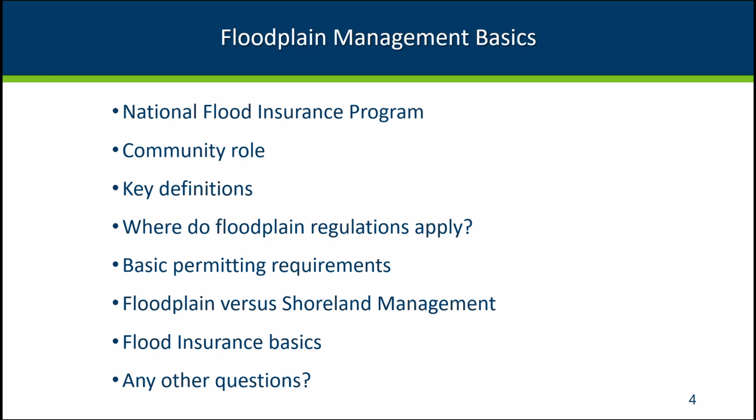But this is a national program. It was started in 1968 when Congress passed these laws, and the three main parts of the regulations and the law at the national level were to identify those higher risk areas, so that's the FEMA mapping part of the program, to have some national minimum development standards, though they are regulated at the local level, and to make flood insurance available.

Flood insurance was really spotty. It was hard for private insurers to handle the risk because their policies tend to be localized in one area. You have one big flood, and it was hard for the companies to stay in business. So they made flood insurance available nationally to help spread out that risk, and they made it mandatory in 1973 if you've got a federally backed loan. Then more recently, mitigation got added as a big part of the floodplain management approach at the national level.

I mentioned that the national program regulations were put in place in 1968. In 1969, Minnesota adopted the State Floodplain Management Act, and in that, we said that the DNR will be the coordinating agency, and it's the state's responsibility to work with communities to get them enrolled in the program, to enforce some minimum standards, and provide technical advice and assistance. We are required by law to review and approve the floodplain management ordinances. And as a state, we provide assistance during disaster situations, though that's mainly with the Homeland Security Emergency Management Division.

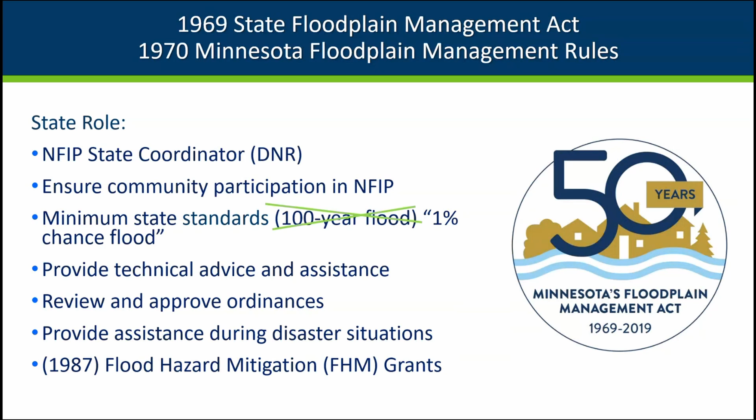And in 1987, we started a state-level flood hazard mitigation grant program, which is pretty unusual to have at the state level. We won't get into any details about that today, but we do have other trainings available talking more about the grant program. So we'll start a little bit with the roles and responsibilities.

So the zoning authority is the city, or the county for the unincorporated areas, and in some cases in Minnesota, we have townships that are the zoning authority. You are definitely the most critical part of those responsibilities. You're the ones that adopt an ordinance, get enrolled in the national program, and administer and enforce those regulations.

At the state level, we do have oversight responsibility. We do a lot of technical assistance and training. As I mentioned, we approve ordinances, and we do have mapping staff, and they're doing more of the data development and mapping than in past years. In these more recent years, we've got a lot of effort being done at the state level. But in general, we're coordinating between the communities and FEMA, and also with the other agencies in the state and watersheds. Watersheds are really important in the state. Some have regulatory authority and regulations that overlap with the state and local regulations, and often have better mapping and data available.

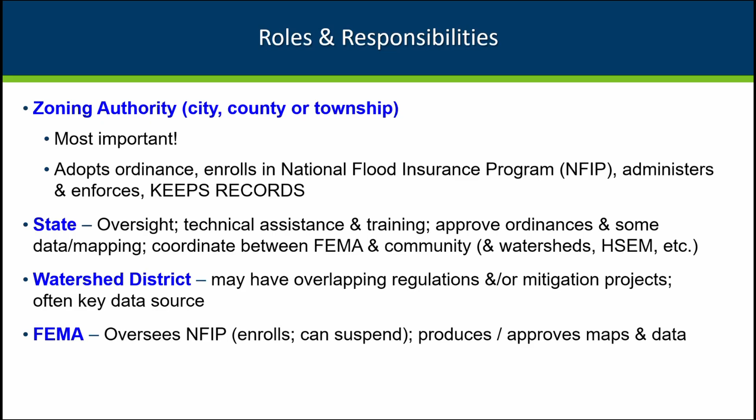I need to mention our DNR area hydrologists. They each have a portion of the state, and they're your first contact for specific projects. They issue our state-level public waters work permits and water appropriation permits, but they also coordinate on land use programs like floodplain management, shoreland management, wild and scenic rivers, and those things. So if you don't know your area hydrologist, especially if you're a local community staff person, you want to get to know who your area hydro is.

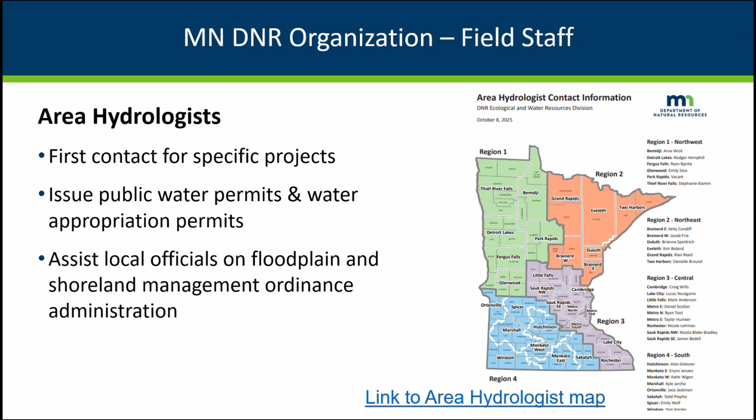So, talking a little bit about what's considered a community for the FEMA program, for the National Flood Insurance Program. It's whoever that zoning authority is. So in Minnesota, within city boundaries, the city's always the zoning authority. And then for the unincorporated portions, the county is the zoning authority. Except in Hennepin, Ramsey, and Anoka, they're completely divided into cities or townships that do their own zoning.

Townships in Minnesota do have the authority to be the zoning authority. Maybe a couple dozen of the townships in the state have chosen to take on that authority. So they will be considered the zoning authority if they have a DNR approved floodplain ordinance. And then, of course, the tribes, they can join the program, but they would work directly with FEMA as sovereign entities there. But we're happy to work with any of the tribal governments there.

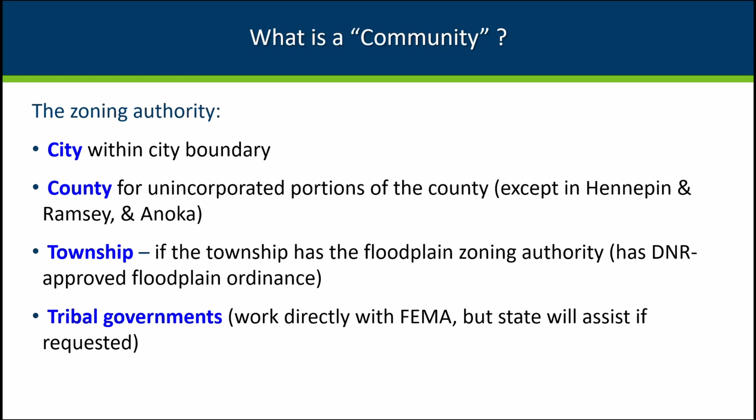So the National Flood Insurance Program is a partnership. The community, when they get in the program, they agree to adopt an ordinance and keep that current. They do have to go through the application process, and you just have to do that once. You don't have to do any kind of annual renewal things, but you are agreeing to enforce that ordinance and to keep records. And that's one of the things that we'll talk about several times throughout the training today. And we get into more detail in our upcoming training on Floodplain Administration 101.

But some of the benefits of being in the National Flood Insurance Program is that if you're in the program, that federally backed flood insurance is available to anyone within your community. Whether they're in the floodplain or not, they can choose to buy flood insurance. And you do have to be in the NFIP to be eligible for some of the types of post-disaster assistance, like most of the permanent public assistance that becomes available if there's been a federal disaster declared. And then some of the mitigation grants are only available if the community is in the program.

But one of the biggest benefits is you're helping to reduce that risk in your community. You're helping to prevent people from building in those higher risk areas and be more resilient over time. All of our counties that have the zoning authority are in the program. Many of our cities are, but we do have a couple hundred little cities that are not in the program. And if you work with those cities, we'd encourage them to get in the program. We try to make the process to get enrolled as easy as possible and provide recommended language and examples of the notices they would need to run and those kinds of things.

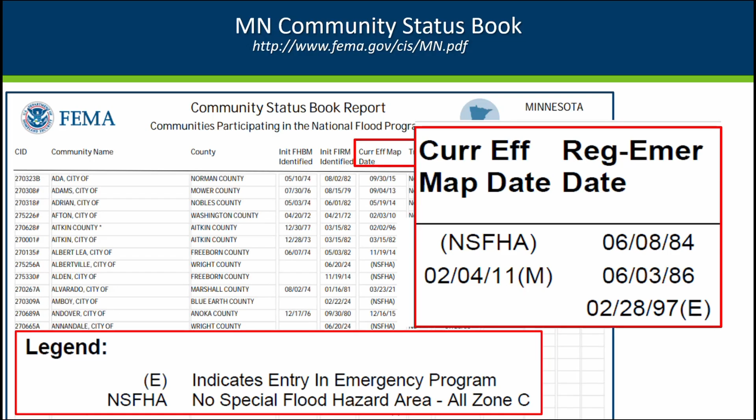And you'll see this NSFHA and say, well, what date is that for my map? It means that there's no special flood hazard area mapped in that community, and it's officially considered all the lower risk zone. On the old maps, it's zone C. If it's got the E here in the date that they got in the program, that means that they're in the emergency program. We have maybe 20 communities left in the state that are still in the emergency program. They're in counties that don't have the updated digital maps in general.

There's one other piece of information in here. It's talking about CRS, and CRS is the Community Rating System, and that's a program that you can get in separately, and you document that you're doing higher standards, you're doing better outreach, you're doing some mitigation projects, you get points, and the more points you get, the better class that you're in. And we don't have very many in Minnesota that are in CRS, but if that's something you're interested in learning more about, we'd be happy to meet with you and talk about that program.

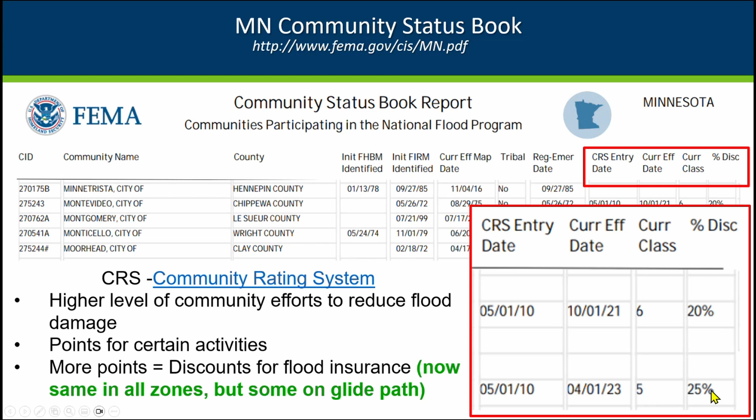The community status book does also list the communities that have mapped floodplain that are not in the National Flood Insurance Program here in the last few pages of that community status book. I do sometimes refer to this as the naughty list, and we would encourage any communities on that list to get enrolled in the program.

The medium risk area is usually the 500-year floodplain, or the 0.2% annual chance flood. But it can be areas where they've been protected by a flood control project and they've gone through an accreditation process, or it can be places where it's the 1% or the 100-year flood, but it's less than a foot deep, or it's draining less than a square mile.

And then the unshaded areas on the old map might be shown as zone C, and then on the newer maps, it's called zone X. And that's the areas where they're not showing any mapped risk, but there still can be local risk. Urban stormwater is definitely a bigger concern as time goes on. And so there still can be a flooding risk, but FEMA really focuses on the riverine areas and the lake areas.

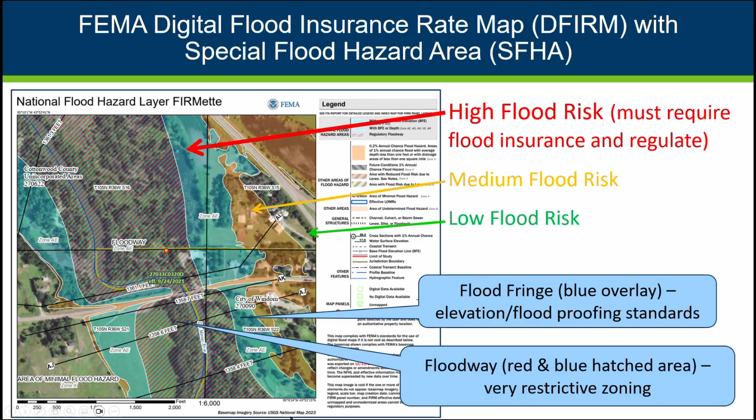When we're looking at data for the FEMA maps, in an area where they've got detailed information, they usually calculate the 10-year, 50-year, 100, and the 500-year, which we call the 10% flood, the 2% annual flood, the 1% annual flood, and the 0.2% annual flood. So we've got data for these different frequencies, but the regulatory level that we're talking about is that 1%.

And on some of the newer mapping, we also have the 25-year or the 4% annual chance flood, and something called the 100-year plus, the 1% annual chance, the upper end of the confidence level there for calculating that 100-year.

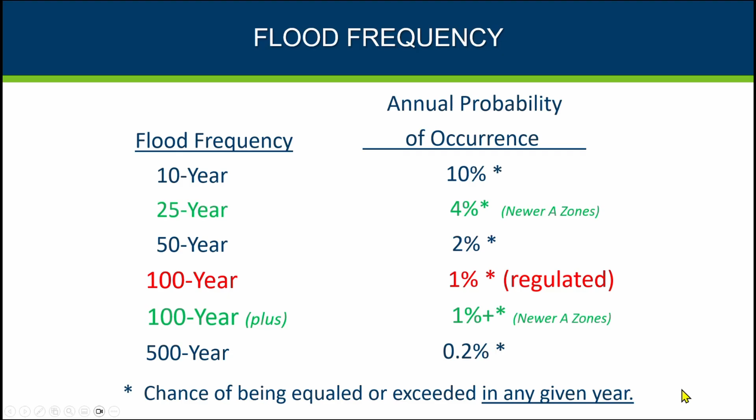So again, we'll be talking about that regulated area, but we do use that data from the other frequencies for other design purposes, like for septic systems, that 10-year. For critical facilities especially, we want to see them above the 500-year or outside the 500-year, some of those kinds of things. The 50-year we'll use for clearance when you're getting public water work permits, a lot of other good reasons to be having that data available.

And I've already used several of these terms, but they're basically synonymous. The 1% annual chance flood, the 100-year flood. We try to not use the term 100-year flood because people have a tendency to think, I've had a big flood, I've had my 100-year flood, I'm good for another 99 years. And that's not the way it works. It really is, you've got a chance every year of having that big flood or a bigger flood than what is shown on the maps.

Another term we'll be using here is base flood elevation, which is what FEMA refers to that 100-year flood level as frequently. If you look in Minnesota law, it'll talk about the regional flood, which is the same thing.

And when you're talking to lenders or insurance agents, they'll tend to refer to it as the special flood hazard area, where the flood insurance is mandatory if you've got a building in or touching the floodplain and they've got a federally backed loan. And sometimes we'll just refer to it as the high flood risk area. We'll talk about a couple of basic definitions, and then we'll go into talking more about some of the regulations.

So right from the beginning with this program, folks realized that not all floodplains have the same level of risk. And so when FEMA, or the feds at the time, that was actually before FEMA existed, but when the feds were looking at what the regulations should include, they said, you know, we recognize that if you're right next to that river, you're going to have greater velocity, greater depths of flooding, definitely higher risk than someone who's maybe on the very edge of a floodplain. Maybe you're in a backwater area, or you're on the very edge of the Mississippi River where it's very shallow. So they decided that we're going to treat the higher risk part of the floodplain differently.

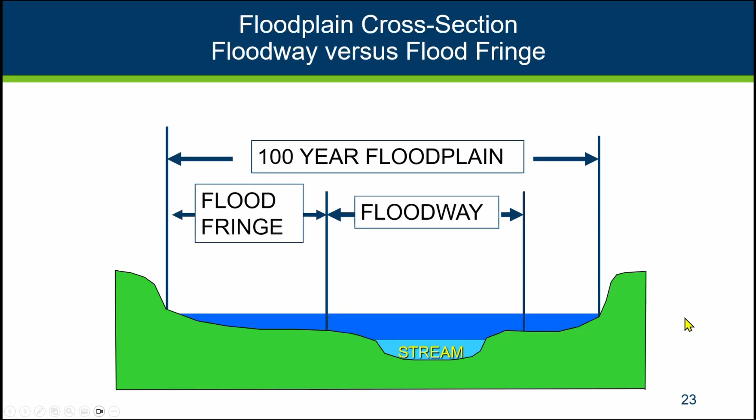And that's the area where we're not going to allow most types of building. And in Minnesota regulations, we say no new buildings can be in this higher risk area. So what they did was they had the engineers model what the floodplain would be at that time, or whenever they were doing the initial modeling. And then they would say, okay, what part of this river should be set aside and left for that flow to go through during times of flooding?

Because we know that it's going to be going certainly along the river and some of those near overbank areas. Where's it high velocity? Where is it deeper? What area do we need to save for the floodwaters to go through? So like on this example, we've got a road along here. We know there might be some culverts connecting it. So it might be getting flooded over here, but it's more of a backwater. You're not going to have the flows through this area so much. So that's an area that they might say, this can be the flood fringe.

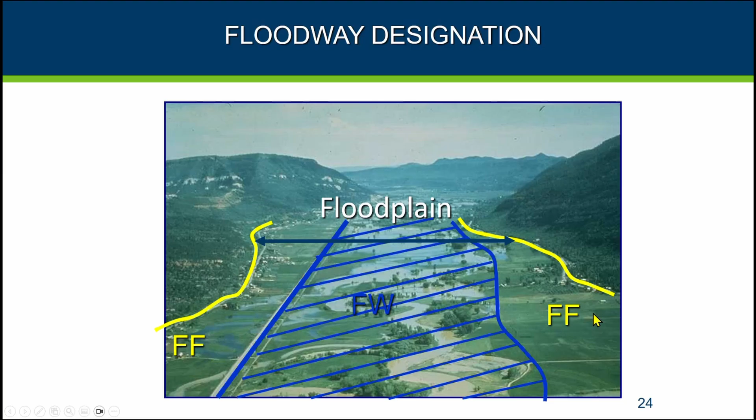And then over here, we might have a little community. They want to be able to allow some of the building expansion of that community. So they drew along there and said, we'd like this to be our flood fringe where we're going to be allowed to continue to have filling and development. And then the engineers would simulate that the flood fringe was all filled in and developed, and then run their model again. And if you take up some of that space with it being filled, it does cause what's left in the floodplain to have a higher flood level.

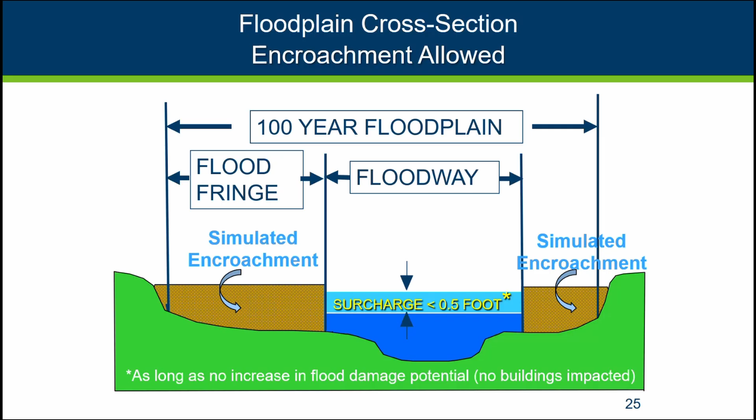The national standard says that filling can't cause more than a foot of rise. And in Minnesota, right from the beginning, since we adopted our rules and statutes back in '69 and '70, we limited it to half a foot and also have wording that says you cannot increase flood damage potential with whatever increase you have. So if there's current buildings in or right next to the floodplain, you can't cause any increase that would touch those buildings. So in an area that's already developed, that means you can't have any rise. And in more rural areas where you've got some space to work, you can have up to that half a foot of rise. So sometimes it was an iterative process to make sure that it was under that half a foot and that you weren't impacting any existing buildings.

So I mentioned the base flood elevation is the FEMA flood elevation, and for the federal regulations, the lowest floor for any new buildings or substantially improved or damaged buildings, including the basement, has to be at the base flood elevation or the 1% annual chance flood. In Minnesota, right from the beginning, they said, well, gee, we're allowing up to another half a foot of increase when we're establishing that flood fringe area that can be filled in.

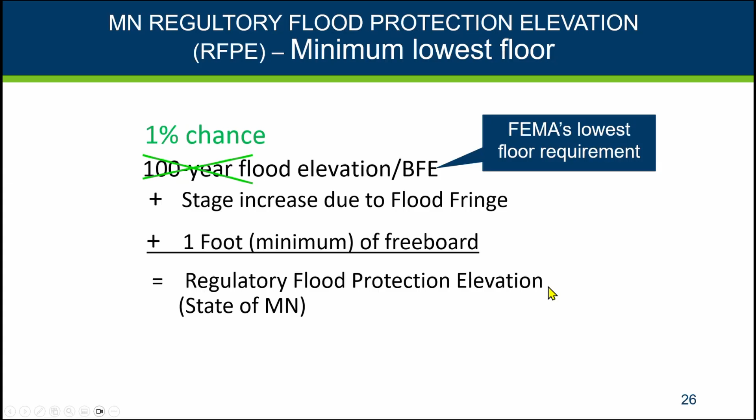So that's really what the flood level would be, is that flood elevation plus any increase. And then we add a foot of freeboard, which is a safety factor. So we add those three elevations together, and we call that our regulatory flood protection elevation, our RFPE. For a little while, the freeboard requirement went away, but it became mandatory again after the 1997 state law change.

And those of you who have been around in the state for a while will remember that 1997 was a really big flood along in the Red River Valley, and a lot of damage. And the legislature said, we're spending a lot of money rebuilding here. We want this freeboard back in there so that we don't have that kind of damage in the future.

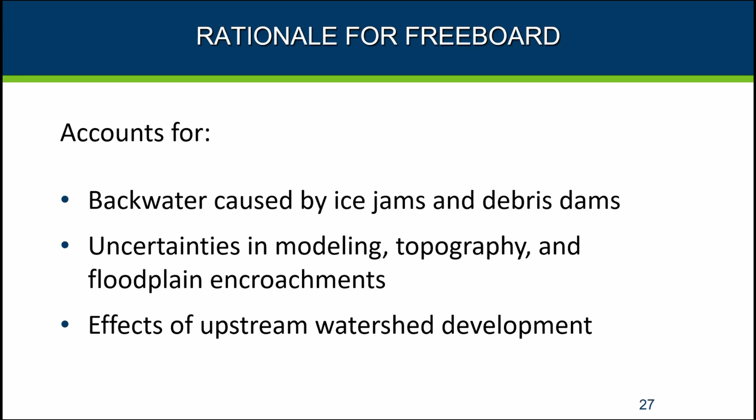Now, a freeboard, as I said, it's a safety factor. It takes into account the fact that when the engineers are doing the modeling, they're assuming no log jams, no ice jams, that water's all flowing nicely through the bridges and the culverts, no obstructions, which we know isn't reality. Other kinds of uncertainties, our modeling's gotten better over the years, but especially in the beginning, we had more uncertainty in our topography information and our data that we were using to develop the models, and also taking into account that there might be future development that hadn't been realized in the modeling.

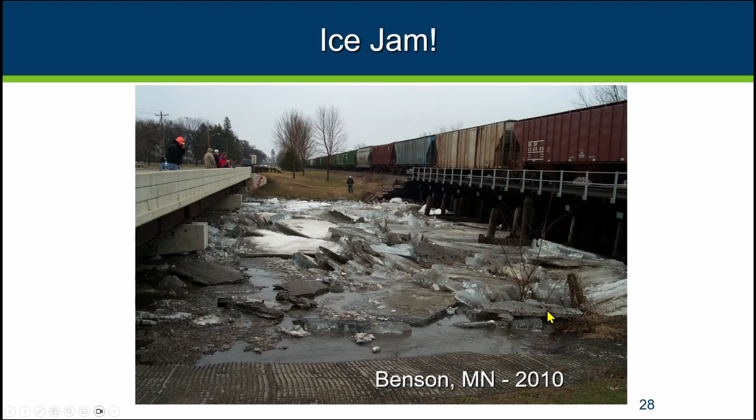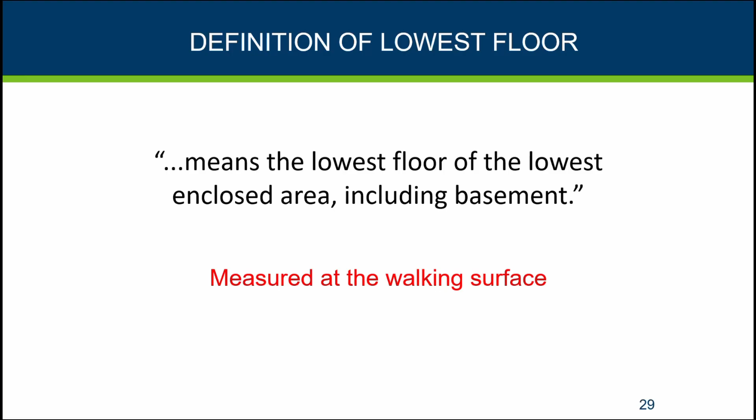So another important definition for our floodplain regulation is the lowest floor. When we're talking about that the lowest floor has to meet that minimum elevation, that regulatory flood protection elevation, we're talking about the walking surface of the lowest floor of the lowest enclosed area. So that includes basements, that includes crawl spaces, and again, it's measured at the walking surface there.

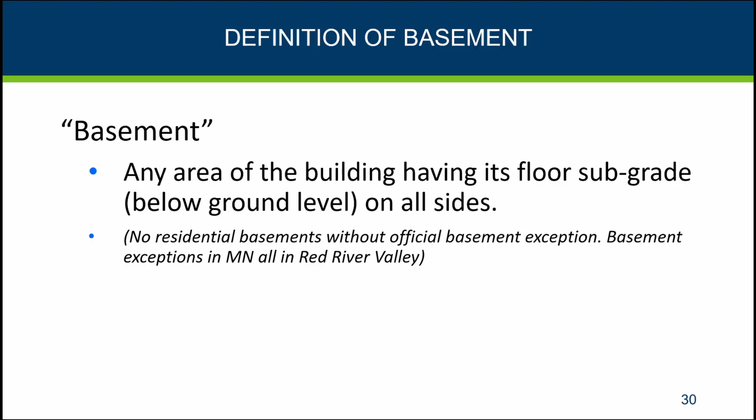And a basement in the federal regulations is any area that's below ground on all sides. And basically, residential basements are not permitted based on the federal minimum requirements, except we've got a handful of communities all in the Red River Valley area where they got a special basement exception, where they are allowed to have some basements if they meet certain dry flood proofing requirements.

The basement, you might have just a partial below grade. That's still considered a basement, even if we wouldn't necessarily call it a basement. We might call it like a split level or a lookout level, but that's still considered a basement. The other thing we run into is sometimes people will call it a utility space or mechanical space, or they'll give it some other name. They won't call it a basement or a crawl space, but that is still a basement according to those FEMA definitions. So that's still your lowest floor, and the walking surface, the top of that floor is what needs to be meeting the minimum elevations.

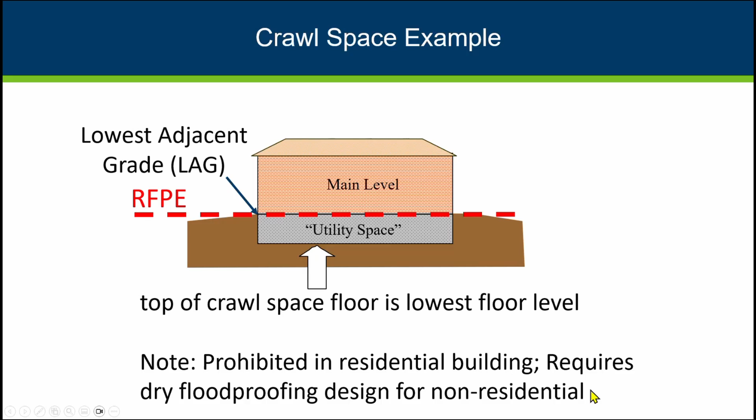And just a reminder that, again, they're prohibited for residential buildings. For non-residential buildings, they can do dry flood proofing and meet certain higher standards like that. So say we're looking at this building, and this is the regulatory flood protection elevation. Would that be meeting the minimum elevation? Let you think for a second.

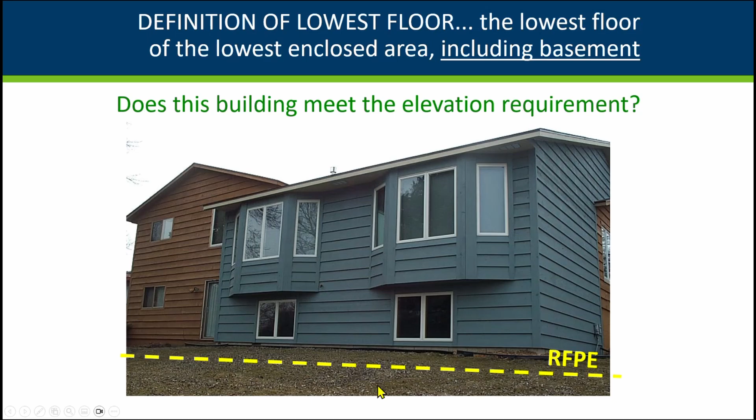But this is a split level, so that's a floor there, that's a floor, and you do have a lookout situation here. So that would not be legal if it was within a floodplain. That example actually was my house when we were putting on an addition, so it's not illegally built, but it's a reminder that in those situations, we're looking at that lowest floor.

I also put this in here because some of our watersheds and some of our local governments, they might have maybe a higher freeboard. Maybe they require a 2-foot or a 3-foot freeboard, but they're looking at the lowest point of entry. And so in a situation like this, they might be meeting that watershed requirement, but they're not meeting your local ordinance, because our federal state requirements are based on that lowest floor, not on the lowest opening.

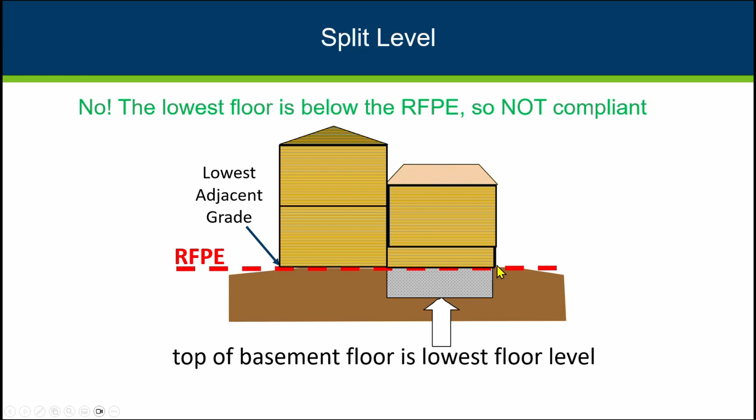So summary here, the key requirements for a building, especially a residential building, are that you're not filling in the floodway and the building's not in the floodway. You're having your lowest floor meet that regulatory flood protection elevation. And then if it's a residential building, they do have to have 15 foot of fill around the building. That can be a foot lower than that lowest floor.

And it can be a more gradual slope, or it could come down a little quicker. You might see sometimes some little retaining walls or something. But at this point, 15 feet out from the building, it's supposed to be at your flood elevation, including that stage increase.

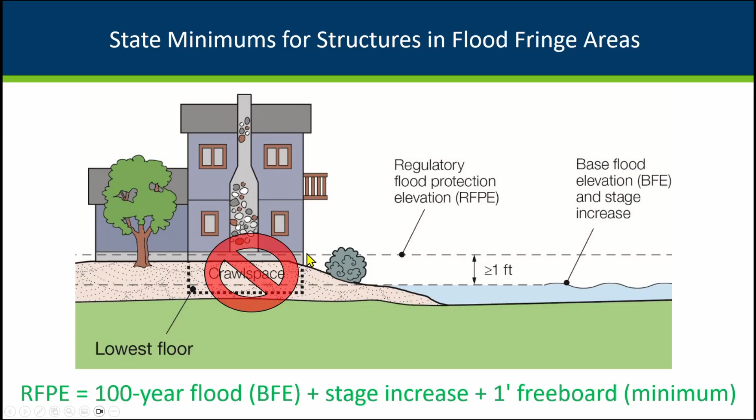Your lowest floor needs to be above that. One other term that sometimes confuses people is the ordinary high. People hear the high water in that ordinary high water level definition, and they think that's the same as the flood elevation. And the ordinary high is the official boundary of public waters in Minnesota, and we use it for shoreland setbacks and for determining if the work is going on below that ordinary high and they need to follow the public water work permit requirements.

But the flood elevation is usually a couple feet higher. And on rivers, it can be 10 or 20 feet higher. But on lakes, it's typically in the range of a couple feet higher than the ordinary high. The ordinary high is based on physical evidence. And it's most commonly where that transition is between predominantly aquatic and predominantly terrestrial vegetation.

And we have crews, our survey crews that go out and do ordinary high determinations on the lakes in particular, and they set that elevation based on that physical evidence. And they might look at wash lines and stain lines and things like that also. Whereas the floodplain is based on calculations, on modeling, analysis, those kinds of things.

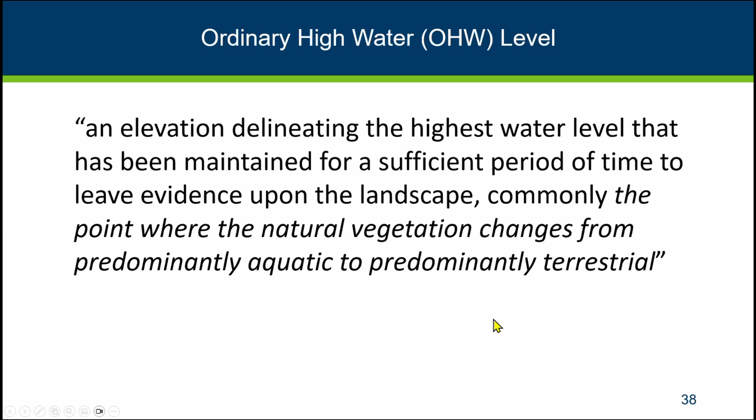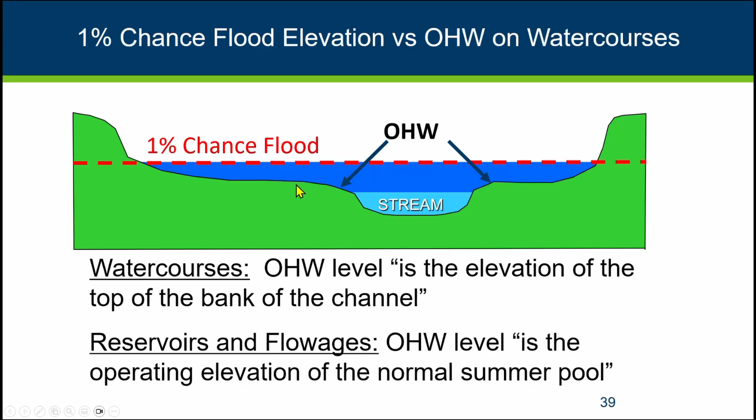And here's the official definition from the state statute there for the ordinary high water level. On rivers, watercourses, the ordinary high is defined as the top of the bank of the channel. And of course, the floodplain usually goes into that overbank area. So it's definitely in a higher, wider area.

So the ordinary high, it's established over a longer period of time based on that physical evidence. As I mentioned, it's used for our shoreland management setbacks. Whereas that 1% annual chance flood, the floodwaters, they'll be more temporary. They're not usually leaving any long-term evidence. And it's really based on modeling and analysis.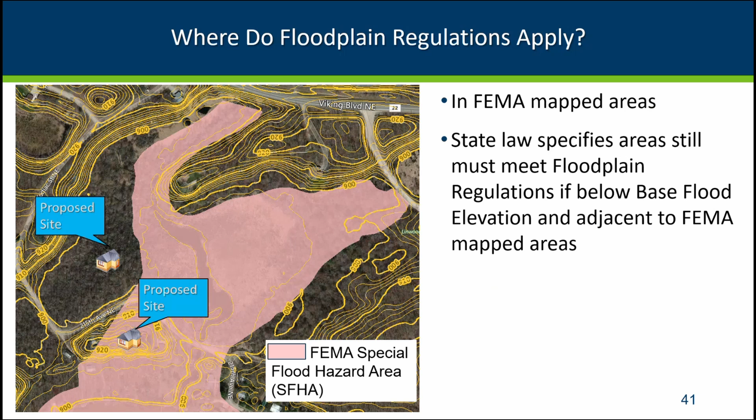So the person who's in this area, now with our LiDAR, we can see more often if an area is low and adjacent to the floodplain. It's been a requirement all along, but it was much harder to see those situations back before we had LiDAR. The other reminder is that we've got many areas where we're overlapping with floodplain and the shoreland regs.

The shoreland district in Minnesota, that goes 1,000 feet from those lakes that are classified, and at least 300 feet from any public watercourses. And if there is a mapped floodplain, it goes to the edge of that mapped floodplain. So remember that even if they're outside of the floodplain, which along the lake is pretty common to see, they still have minimum elevations within that entire shoreland district.

And what the shoreland rules say is within the whole shoreland district that if you know the flood elevation, you're going to use that regulatory flood protection elevation, which is that 100-year plus a foot. Most lakes won't have a stage increase. So it's usually just the 100-year plus a foot.

So here's your 100-year, you've got a foot, that's your minimum elevation. But if you don't have that flood elevation calculated, the shoreland rules say you use our ordinary high water level or the highest known water level, whichever's higher. So whichever's higher of the ordinary high or the highest known water level, you add 3 feet, and that's your minimum elevation.

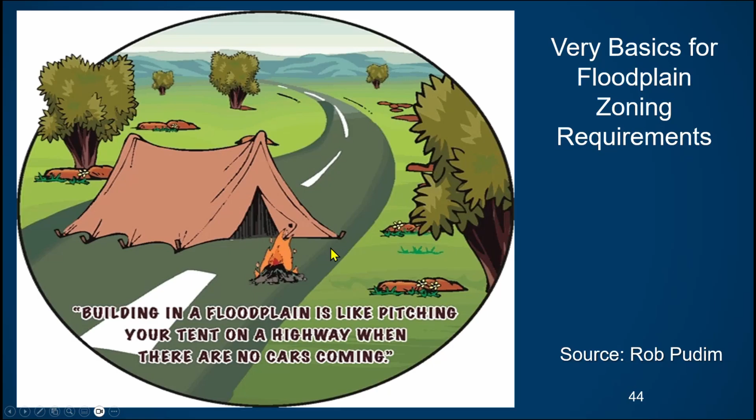So I'm going to talk briefly about the main zoning requirements. And this cartoon here says, building in a floodplain is like pitching your tent on a highway when there are no cars coming. Here's the road, we know where the cars are coming, and similar with the floodplain. We've got the mapped floodplain where we're most likely to have the flooding. We know that, it's on a map. We're going to make sure that we don't put buildings in that high flood risk area.

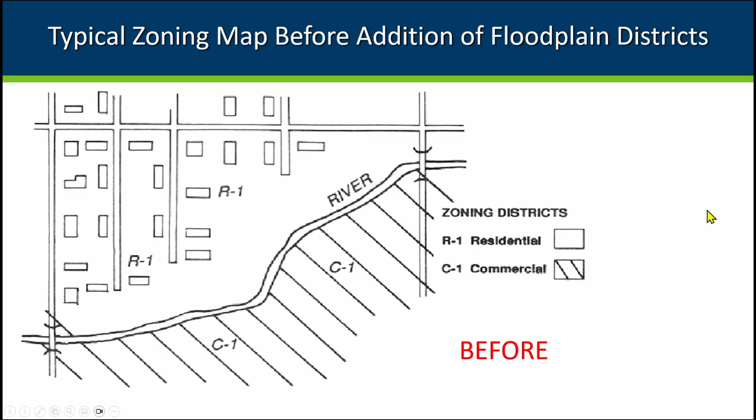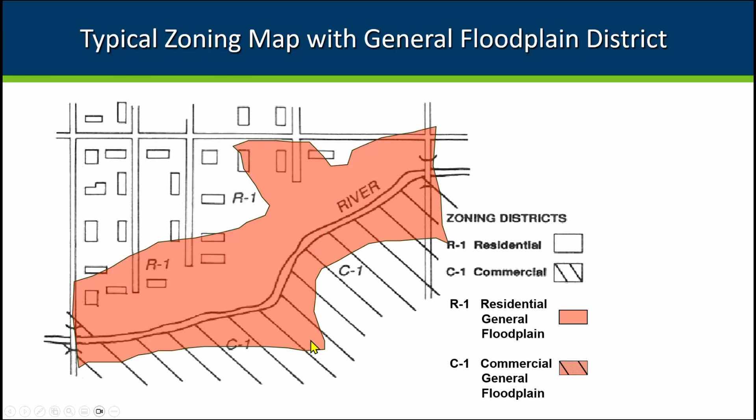So let's say the community had zoning, but it was before they had any flood information. So they had some residential, some commercial area. Along come the FEMA maps that get overlaid on this zoning. So in addition to looking at whether it's a residential or commercial zone, we're also looking at this overlay district, this floodplain district. And in some areas, we have the floodway calculated and mapped on there.

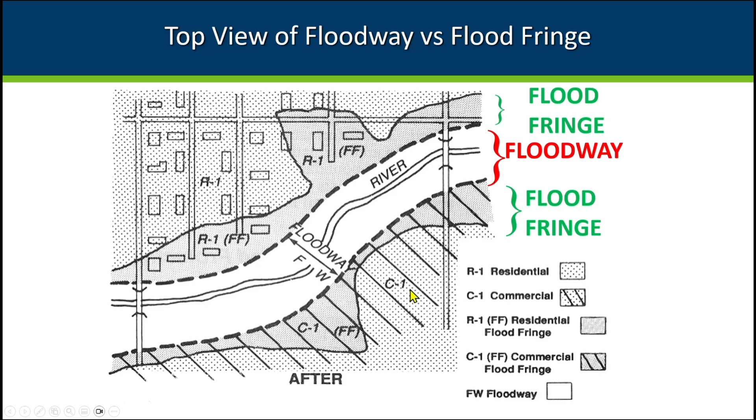So the main requirements are that most structures are going to be prohibited, most kinds of buildings. Definitely any residential buildings, primary buildings will be prohibited. There are a few accessories to open space uses that can be allowed, but most uses are not allowed in the floodway.

Then if you're in the floodway and you're putting in a new road or you're doing grading for a trail or a parking lot or something like that, you must show that with the grading you're doing there, you're not obstructing the flow. You're not increasing the flood levels for anybody. So you have to do some analysis of that proposed grading and show it won't increase the flood levels.

If you're in the flood fringe area, whatever's allowed in your underlying zoning is allowed, but there will be minimum elevations for that lowest floor, usually based on filling, but we have some alternative elevation methods people can use. They could be up on stilts or up on a perimeter wall that allows flows through. And if it's a residential building, that requires a conditional use permit.

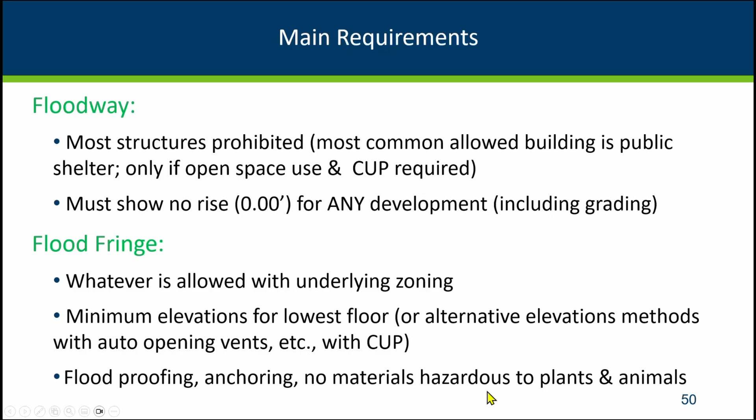Many of our floodplains are called Zone A's, where they haven't done a detailed study and haven't figured out where the floodway is. So from a zoning perspective, you're treating that whole area as floodway until it is modeled or shown otherwise.

On lakes, we do have some optional wording in our model ordinance that as long as it's not part of an actual flowing system, it's not near the tributaries or outlets, it's not in a flowing area next to the lake, then you can say that the area below the ordinary high is the floodway, the area above the ordinary high is flood fringe, where you can allow development. And that's taking into account that we have setbacks. We only allow minimal disturbance in the shore impact zone, that area closest to the lake or the river.

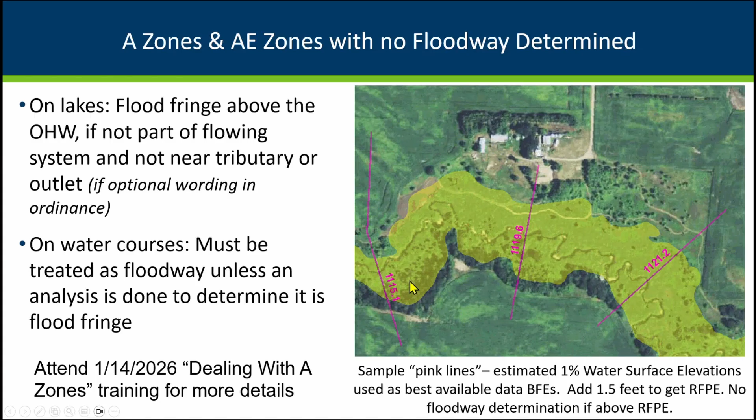We do have a training coming up in January if you want to learn more about dealing with some A zones and figuring out floodway versus flood fringe with some accepted methods. But in general, we're going to assume the full potential stage increase. So we're going to add the foot for the freeboard and half a foot for stage increase in any of these A zones where we haven't calculated where the floodway is yet.

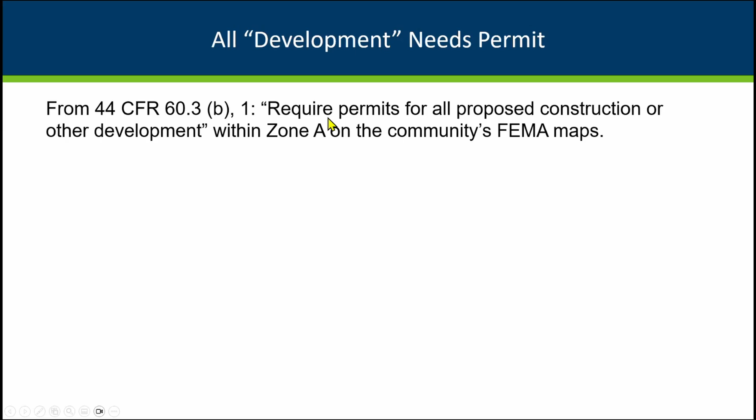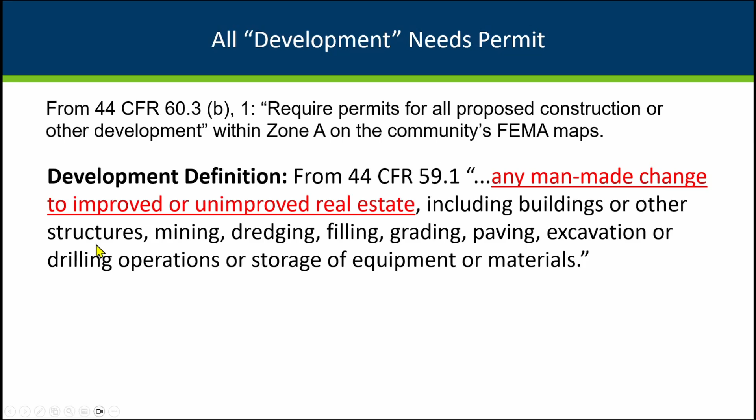FEMA defines development very broadly, and they say that you have to have permits for any form of development in your floodplain. That's what your ordinance says, and that comes from federal regulations. And their definition of development is very broad. Of course, it includes buildings, but it also includes any kind of other man-made structure, and grading, mining, dredging, filling, all those things are considered development, and you need to have some kind of permit.

It might be a building permit for the buildings if you've got state building code. If it's not a building, you're going to give them some other kind of permit. Most communities will call them a floodplain permit or a land alteration permit or a zoning permit. Whatever you use, that's up to you.

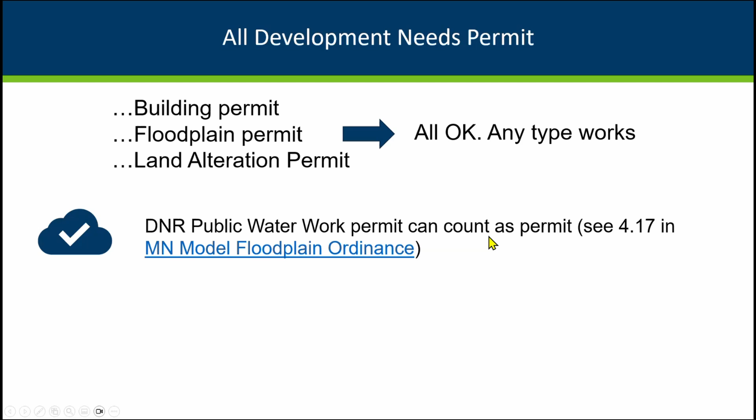But the couple of exceptions would be if you're getting a DNR public water permit for a project that's mainly below the ordinary high. If they're getting that public water permit, you don't have to have a separate permit at the local level. But if you've got other higher standards, other regulations, you may still be giving them a permit. You can waive fees or have reduced fees if it's something that you wouldn't require a permit if it was outside the floodplain.

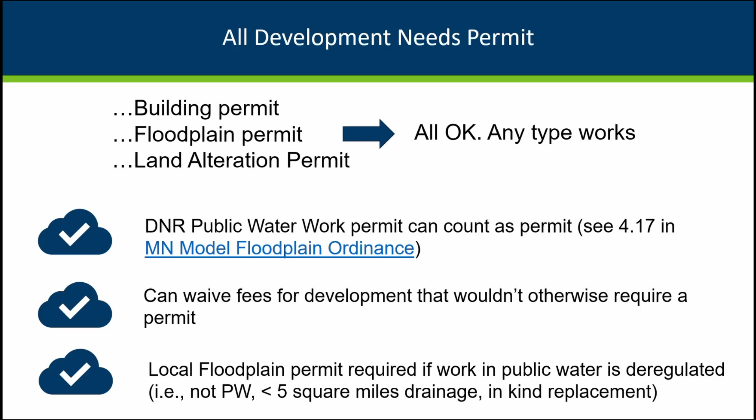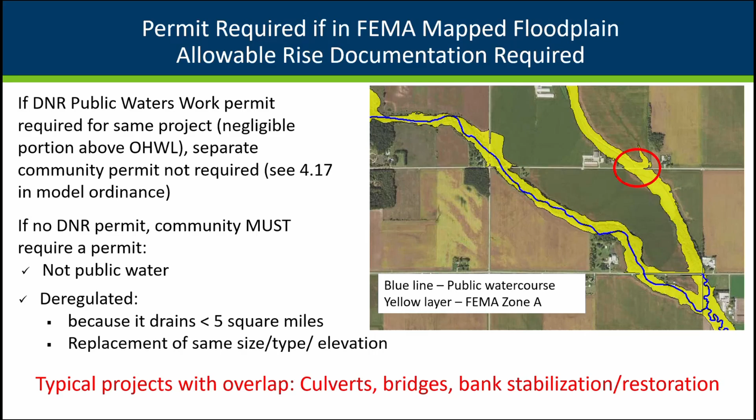The other reminder is that the DNR regulations don't require a permit for those crossings and grading in the areas that drain less than 5 square miles, or if it's a replacement at the same size, type, and elevation. So it might be that they don't need a DNR permit, but they will need your local permit because they have to have a permit for that work.

When is no permit needed? If it's like a tent that's up for maybe a local community event, or like they'll put up something sometimes in the parking lots seasonally to sell plants or those kinds of things. Those are temporary structures that don't need a permit. Or recreational vehicles that are travel ready. They're licensed to go on the road, they have functioning wheels, they've got a quick disconnect. Those don't have to have a permit as long as they meet that travel ready requirement.

But you do have to watch those RVs where people essentially turn them into their cabin. That's like their second home, they end up adding decks, or sometimes they'll even put things over that RV. That is not travel ready. You can't do that in the floodplain.

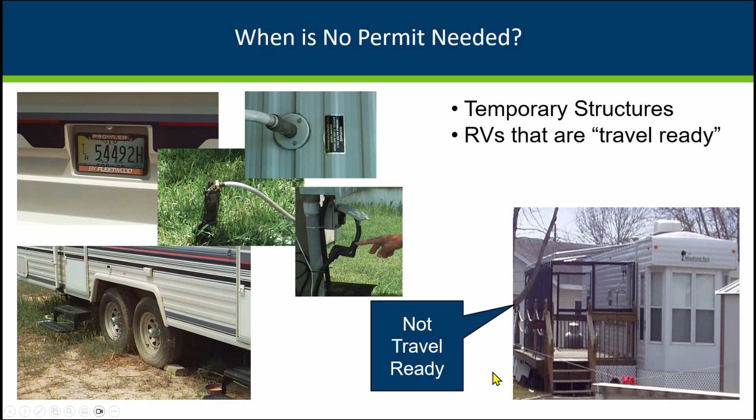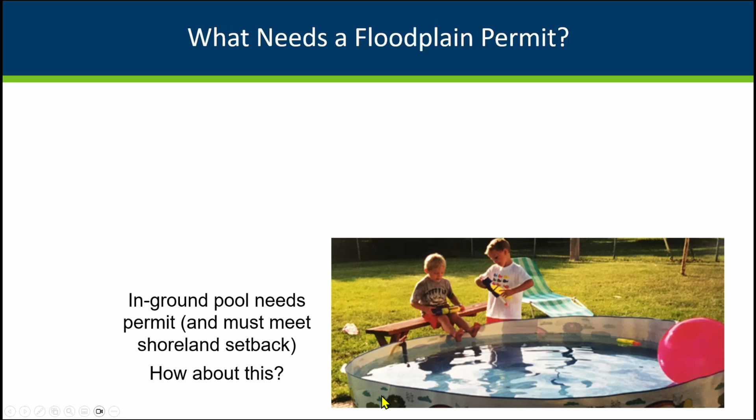So how about this? In-ground pools definitely need a permit and need to meet shoreland setbacks, but this is showing a more temporary kind of pool. That doesn't need a floodplain permit, but it might. I know that some communities require permits for even those seasonal little pools if they're over a certain depth. And we did have an article about pools in the floodplain in one of our past Water Talk newsletters.

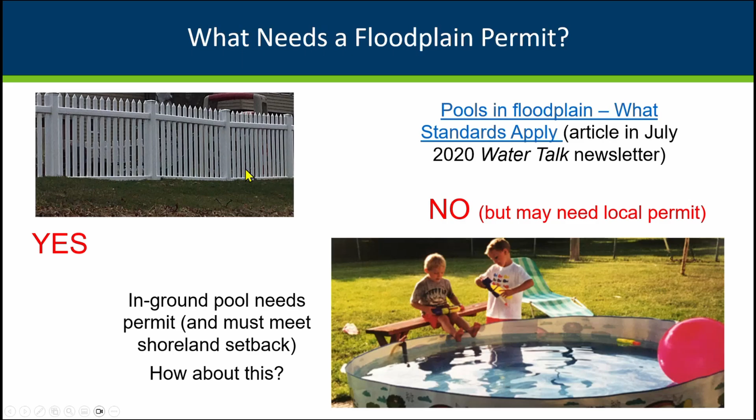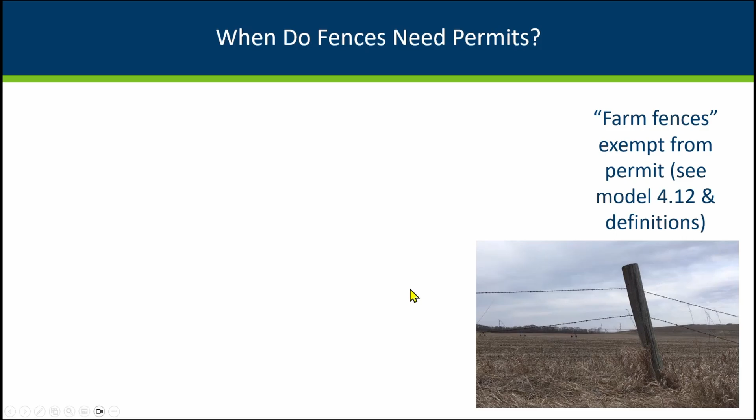But how about this? How about fences? They do need permits. And that's something that FEMA's really started emphasizing. Oh, gee, about 20 years ago, they made sure that we had language in our model ordinance making it clear that fences need permits. Now, we did get an exemption. We've got statute that defines farm fences that are basically the posts and the wire, that those don't need a floodplain permit. But these solid kinds of fences, including chain link fences, do need a permit.

They need to be anchored, have flood resistant materials, and if they're in a floodway, they need to do the no-rise analysis, make sure that it's not blocking that flow and causing increases in flood levels.

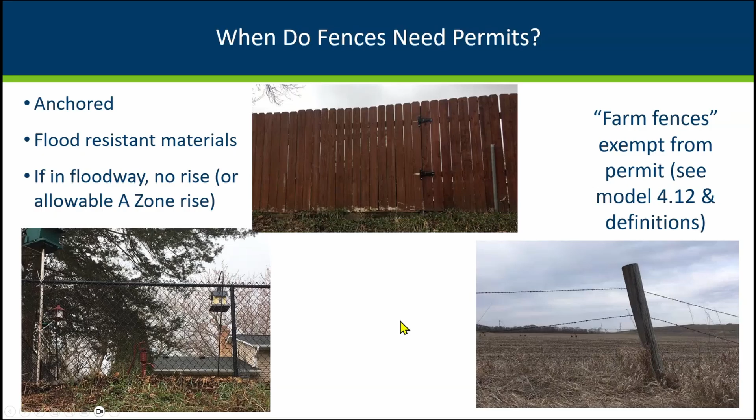And if they're in an A zone where we haven't figured out the floodway, they need to show that it doesn't cause more than that allowable rise, that half a foot, and that any rise won't touch any existing buildings. And people say, well, but gee, chain link fences, they've got all these openings. Well, when you have a flood, they catch all the debris.

So again, in the floodway, we're going to allow very limited uses. This is actually a trail along the Mississippi River. Trails are allowed as long as they show no rise for whatever grading they did, but you still can have some damage. They had this light post, but a big log came along and knocked it over there. So you can't say there won't be any damage with the things that are allowed, but these are things that have less damage than, certainly, building a home in that area.

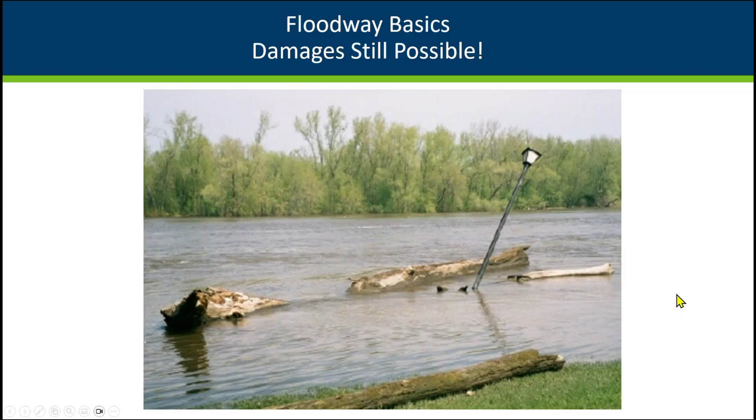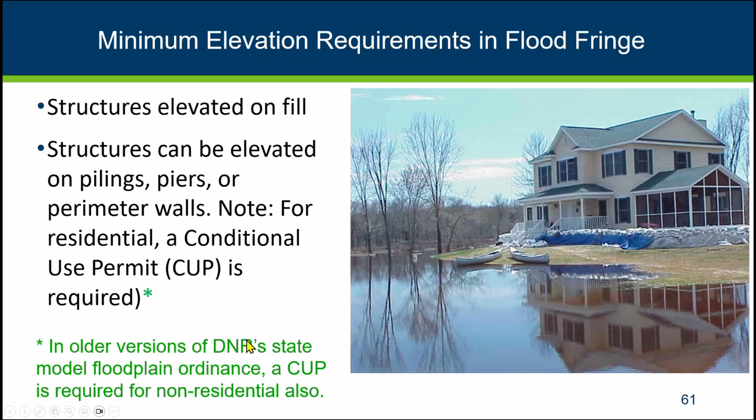Now in that flood fringe, you can have houses, you can have primary buildings, but they do need to meet that minimum elevation, that regulatory flood protection elevation. We showed that the lowest floor has got to be at the regulatory flood protection elevation. The lowest ground next to the house needs to be the flood elevation with the stage increase, and residential buildings need that 15 foot of fill coming out there for some extra protection. And here we've got the boats so that people can get there during floods, basically. So we talked about this a little earlier, but this is the fill version to bring it into compliance.

For small accessory structures, those that are up to 600 square feet, they can be wet floodproofed. And I want to mention that we did just earlier this year update our model ordinance. It used to say 576 square feet, or a 24 by 24 garage, and even older ones said 500 square feet. The FEMA guidance that came out a couple years ago allowed up to 600 square feet, so we've updated that in our model ordinance.

But they do need to have flood-resistant materials up to the regulatory flood protection elevation. They need to have any utilities, which should just be electric. If you have plumbing in there, I suspect that you're not just using it for parking and storage, and you can only use this wet floodproofing option if it's for parking or storage. You need to have it anchored, and they have to have automatic openings on at least two sides of the building.

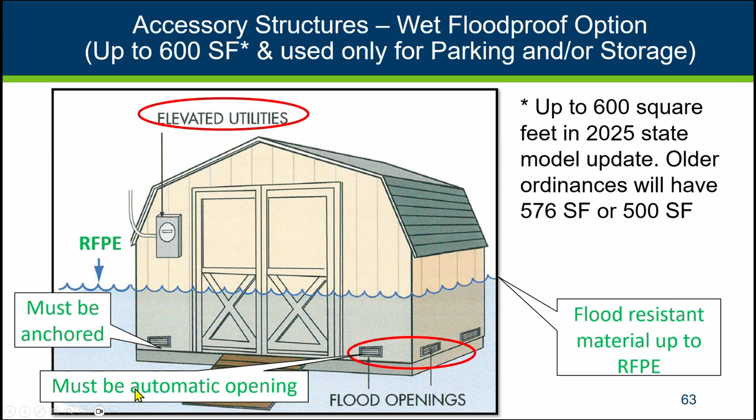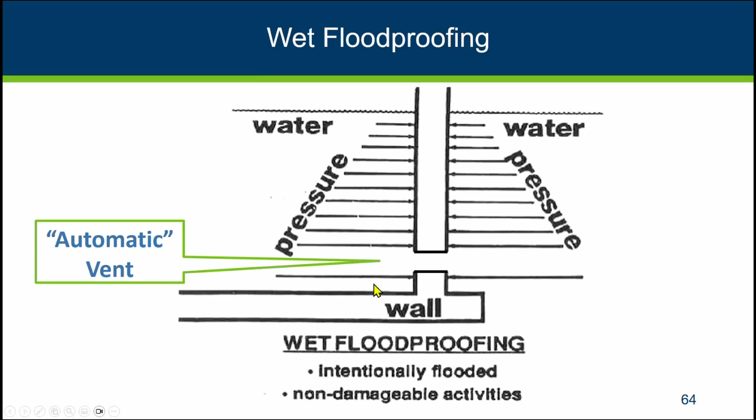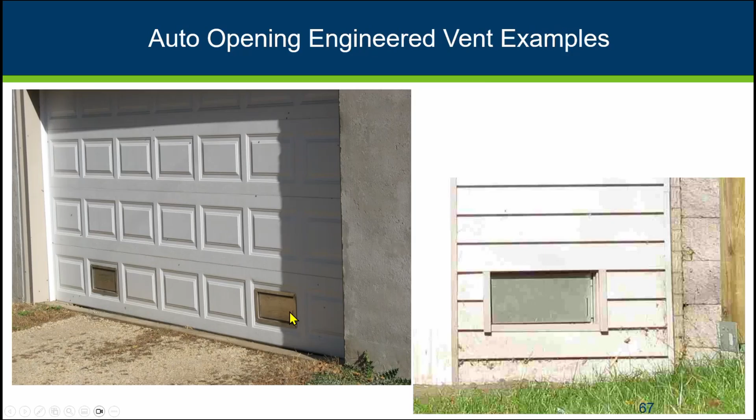And there are some engineered options, and like this example, the company certifies that as equivalent to 200 square inches of opening. So those are nice when you want to have an insulated space also. There is this guide for calculating the area, the net opening of these non-engineered ones. So documentation that the work is compliant is mandatory. After they have done the building, you need to require that they submit that as-built information.

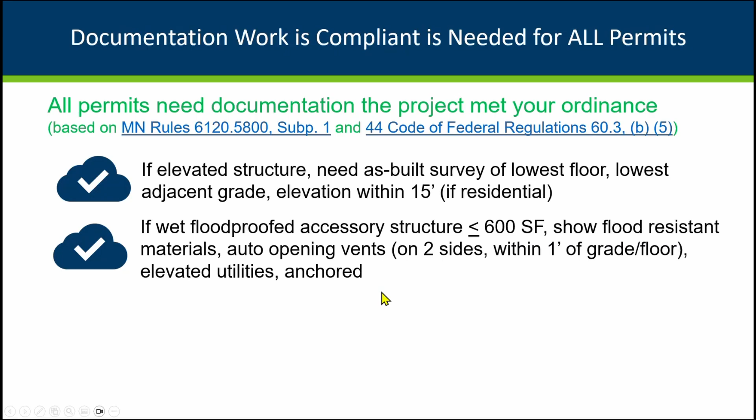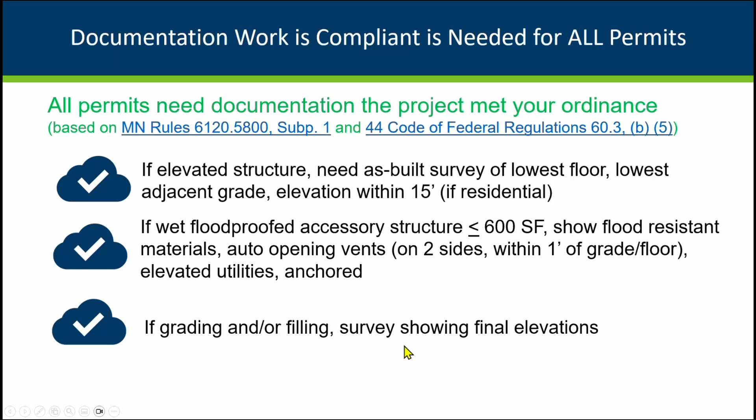And for wet floodproofed buildings, they don't necessarily need a surveyor to get out there, but they need to show with pictures relative to the ground that it's anchored and it's got those flood-resistant materials. And if there was grading or filling done, like a new road crossing, they need to show those final elevations. We do have an article about using LIDAR for some of the situations, like those accessory structures, where they're clearly meeting the minimum elevations.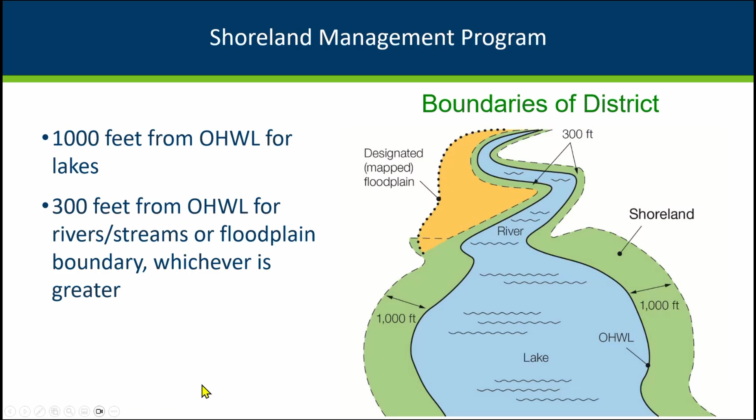Again, within the shoreland program, you're meeting those minimum elevations. The shoreland program is more focused on water quality and protection of the natural resources. It's just state law, whereas the FEMA regulations kick in for floodplain. And you need to meet the most restrictive. So floodway, you can't be building there.

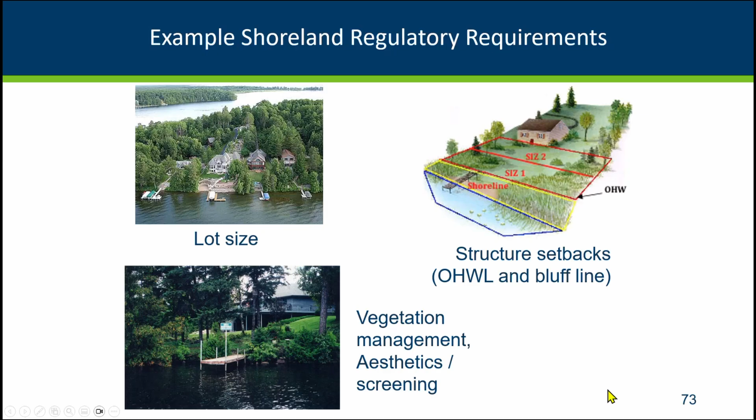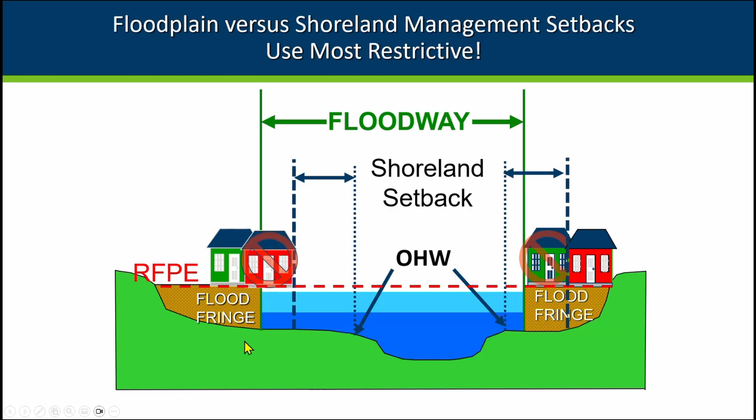But in the shoreland areas, you'll have setback requirements, the shore impact zone, no intensive vegetation removal, a lot of other requirements. So they need to meet their shoreland setback also. And sometimes shoreland setback will be more restrictive, sometimes a floodway will be more restrictive. And again, meeting the minimum elevations in the whole shoreland district.

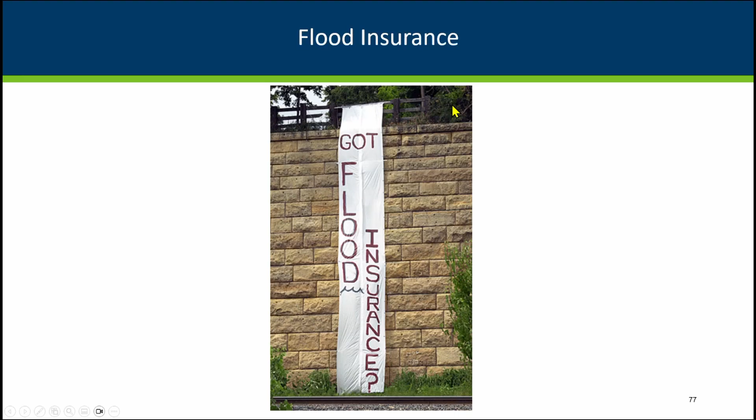So we just got a couple minutes left here. I'm gonna just give some highlights on flood insurance. Flood insurance, and this was a comment from the folks that lived up high on a new development that was going in next to the Mississippi River, downtown St. Paul. But who can buy flood insurance? Anybody who's in a participating community in all the flood zones. They can buy flood insurance if they choose.

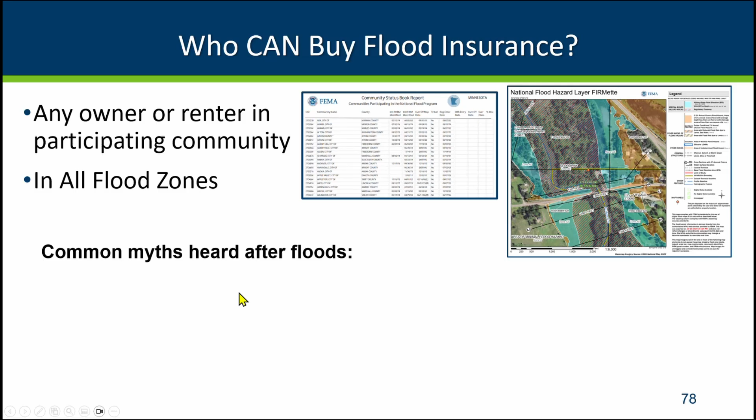Some common myths you hear is, my agent told me I can only get it if I'm in a flood zone. Wrong. You can get it in all the zones as long as your community participates. We've also heard the opposite. My agent told me I can only get it if I'm not in the flood zone. Absolutely false. You can get it in all the zones, and it's going to be mandatory if you're in the flood zone and you've got a federally backed loan.

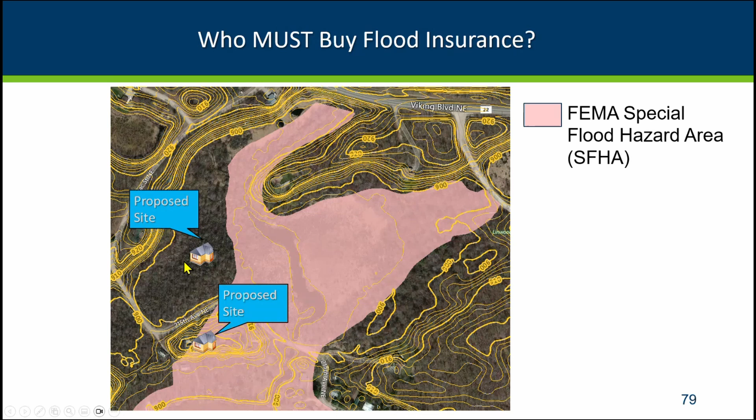Again, this is the mapped area. You're required to get flood insurance if you're in that mapped area, unless you go through a letter of map amendment process and submit information officially showing you're higher. Then you can get a waiver from that. If you're not in the mapped area, your lender won't require you to get it, but it would be advised. You know you're low.

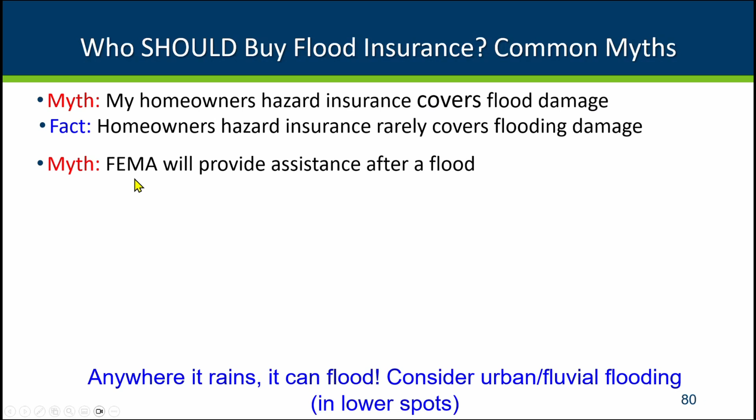Another myth, people think their homeowner's insurance covers flooding damage. It doesn't. And you can get a rider for the sump pump failure or sewer backups on your home insurance, and that is something that flood insurance won't cover. People think, well, if there's a flood, FEMA's going to be out there handing out money to people who are damaged. That is not the case.

First of all, you don't see assistance from FEMA except in the very biggest floods, when there's a presidential declaration for individual assistance, which is very rare in Minnesota. We've had that happen a couple times in the last 20 years. And when they do have that individual assistance declaration, most of the assistance is in the form of loans that must be paid back. The non-loan assistance is very minimal.

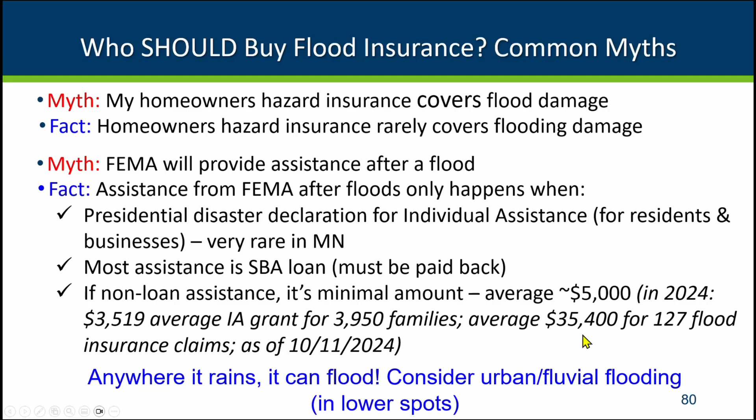It's a max of about $24,000, and the average is closer to $5,000. And we did have individual assistance in many counties last year. The average grant was about $3,500 versus the average flood insurance claim that was closer to $35,000. So, I'm going to go through some of these more quickly.

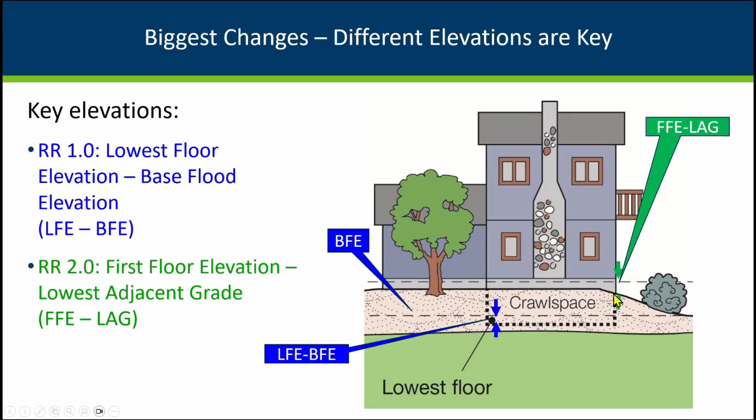It used to be FEMA looked at, for the insurance rating, where's your lowest floor compared to the base flood elevation. Now they updated the way they rate things, and they look at the lowest adjacent grade compared to the first floor elevation. And they used to look at just what zone it was in on the map, what the flood elevation was, what kind of foundation you had, and then the elevation of the structure if you were in the flood zone. Now they look at all kinds of other factors.

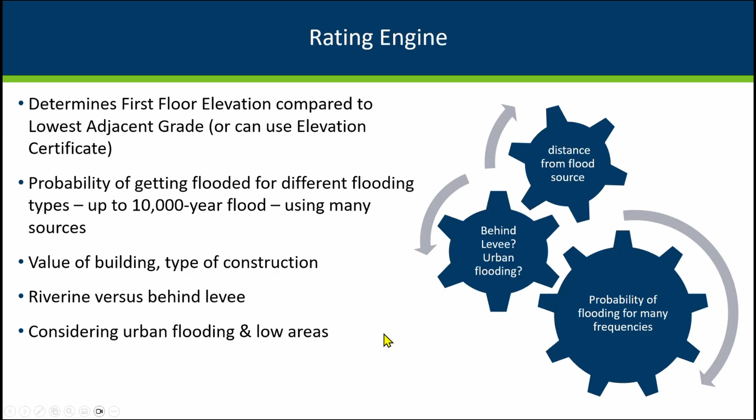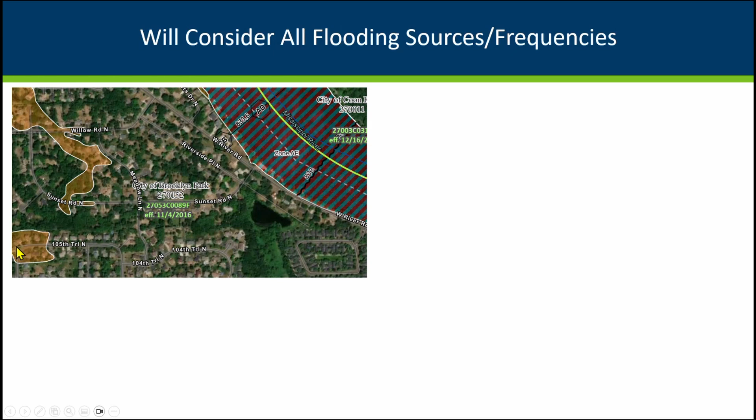And it's in this rating engine, we don't see all the data that they're using. They've got a lot of data. They look at a lot of different flood frequencies and all kinds of different factors. They will look at each building individually. The FEMA maps might just show here in this example, the Mississippi River, and they've got 500-year zones here. But when they're looking at the flood insurance ratings, they're looking at some of that other localized flood risk from the stormwater kinds of flooding you might see.

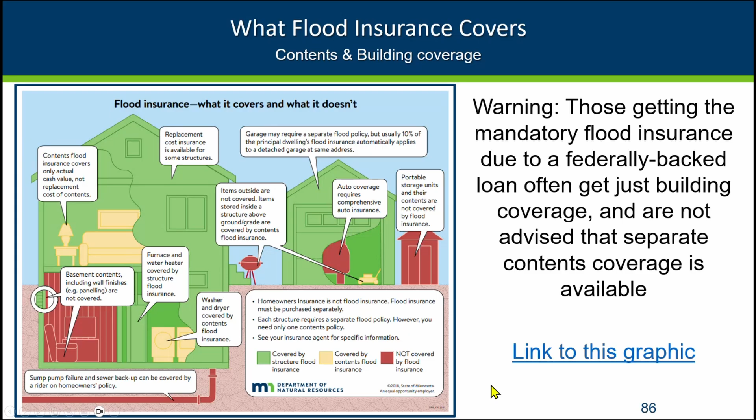And just a warning that if you're getting the mandatory insurance, a lot of times they will just get it for the building coverage and don't advise people that you need separate contents coverage to have your contents covered. So make people aware of that if you do talk to citizens who are asking about flood insurance.